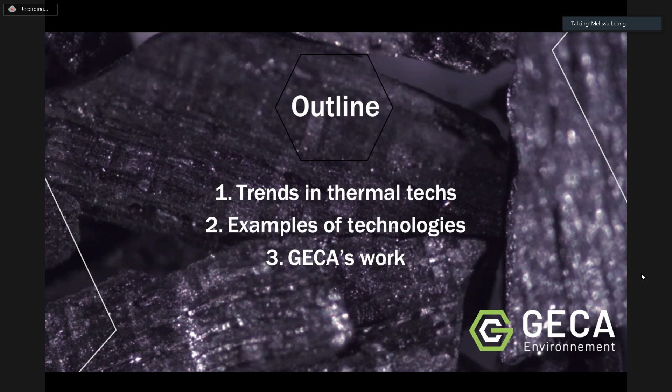Okay, so really quickly, the outline: I'm going to talk about GECA first. I changed the order, I think it makes more sense for your understanding of the data I'm going to present. Then we're going to talk about trends in thermal tech, what we're seeing these days, how it's going, and how it seems to be influencing the market. I also have short examples of technologies just to illustrate the variability and the trends in the market. Again, as Tim said, don't hesitate to ask questions and direct them to me directly after the session. It would be a pleasure to answer them and have a discussion if we can.

So first and foremost, I want to introduce our firm. We are a consulting firm, very specialized in valorization of waste, so waste conversion into renewable, valuable products. We specifically specialize in the thermal transformation processes of torrefaction, pyrolysis, and gasification. We're located in Quebec, Canada, so the black sheep of the Americas. We do speak French, but we actually have clients throughout the world, including a lot in the US. Part of what we do is really technical consulting, supporting project development in business plans, choosing the right technology—because we all know there's a plethora of them—as well as process optimization. For example, I'm in business development, and I also lead the carbon team. At GECA, we also do carbon project development and brokerage, specifically for biochar carbon credits. That's not the topic of my talk today, but feel free to ask questions on the subject as well.

Through our work, especially through our technology assessment and evaluation work, we have gathered a long list of technologies within the processes we specialize in. So what I'm going to present today is data coming from knowledge of these technologies and that list. All right, so everyone in the room, I think, knows what thermal transformation is.

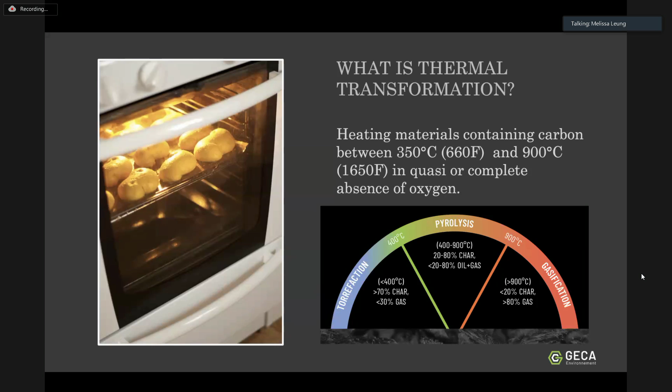I'm sure people mentioned it earlier in the presentations, but for this specific presentation, I'm mostly going to be speaking about torrefaction, pyrolysis, and gasification. Generally, these refer to very low amounts of oxygen in high temperatures throughout. That's really what we specialize in, and the data I'm going to present is specifically on these types of technologies.

So here we go with the data. Through our technology evaluation and our technology watch, we've listed more than 200 thermal transformation technologies - techs in gasification, pyrolysis, and of course torrefaction as well. We've listed them throughout the world, but most of the stats I'm going to present today are for North American tech, specifically from Canada and the US. We've actually been putting together a technology report that lists these technologies and their characteristics, and some of the stats I'm presenting come out of that report.

What we're seeing is that there's approximately 120 technologies that are at TRL 7 or more advanced in Canada or the US - they have to have an office or headquarters in Canada or the US for us to account for them in these stats. And we're seeing that the techs are mostly focused on large productions more and more. This graph on the left presents the size and the ratio of the distribution to the two countries. We're really seeing a lot of interest in larger technologies because smaller technologies have mastered the thing - pyrolysis gasification is a known technology, so lots of scale-ups are happening with tech providers. That's what this table is intending to present.

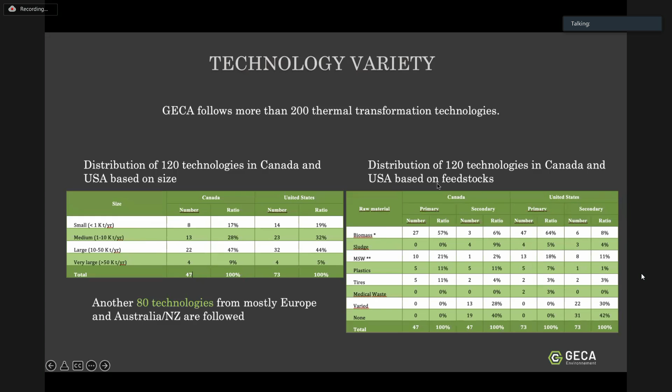We also looked in that report into what those technologies are looking to produce. We have people here presenting today talking about plastic transformation for liquids production, whether it's energy or chemicals. We have people talking about solids, talking about energy, whether heat or gases or both.

What we've seen in the US and Canada is that there's a bit of a difference. There's a focus in the US on energy and gas. On this graph, we can see on the third column here that the paler bar is for gas. There's a larger proportion of technologies where the priority is to produce gas.

Our interpretation of this compared to, say, Canada is that in Canada, energy is quite cheap. We're from Quebec - I know sometimes it comes out in the accent, sometimes it doesn't - but but in Quebec and BC, for example, energy is super cheap. We have hydro, and in Quebec we pay, I think it's 7 cents Canadian a kilowatt hour. So there's not this need for large scale gas or energy production. A lot of things are electrified and use electricity, even industrial processes. Same thing in British Columbia and in big parts of Ontario as well - so the three largest provinces.

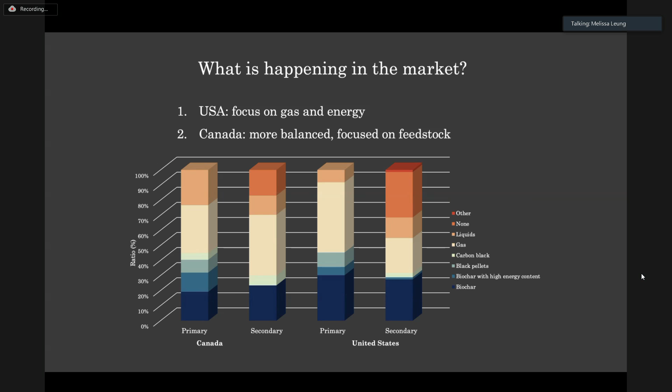So Canada seems to be more focused on the feedstock rather than necessarily on the products. So that's what we're seeing too.

Aside from those stats, we work every day in this market, and what we're seeing through technology assessments and evaluation for project development is that lead times have really increased for deliveries and manufacturing over the past year. Part of it seems to be due to COVID, part of it seems to be due to larger demand in general, and also prices of components are increasing. I can't see you guys, but if I say steel prices are high and increasing and that's affecting those technologies, I'm sure you'd all nod. So we're seeing a lot of that.

In the pyrolysis, gasification, and torrefaction sector, we've seen lead times go generally from maybe 6 to 10 months prior to COVID, let's say 2 years ago, to 12, 14, 18 months for some manufacturers. So double the lead time, and that can be a problem for project development and implementation.

We're also seeing a lot of cost increase. Steel prices, again, inflation, labor is difficult. Manufacturing has increased a lot. So this is something that's affecting the whole industry.

Another really large component that I don't know if it was discussed at the current conference is the carbon market. We work every day in biochar. I lead the carbon team in which we develop biochar carbon projects and sell biochar carbon credits. And that market has just exploded over the last 2 years. It is a new market, but the demand is so incredible that it's actually generating a lot of interest in those types of technologies, and manufacturers have orders piling up.

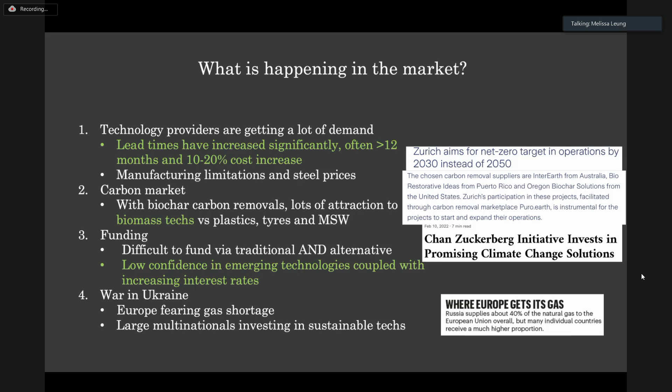And lastly, the war in Ukraine. I don't know if that was discussed again, but this is something that affects us quite a lot. In Europe particularly, it's fast tracking some projects because they're very afraid they're going to lack gas in the winter. So it's fast tracking projects that use biomass to gas or even other types of feedstocks as well. We're also seeing that the war is generating interest from large corporations into these types of technologies. So it's kind of some light within the dark of what's happening over there.

Something important I forgot to mention: we're very technology agnostic, so we don't have any links or contracts with any of the technologies for bringing business to them or anything like that. It's very important to us to be agnostic so we can give the best suggestions to our clients and find the best systems for them. And that's why they're not named.

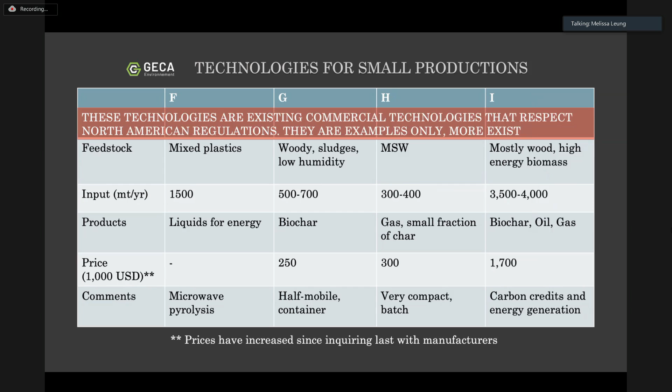I want to say something else, but I think I forgot. So I'll come back to it later, perhaps.

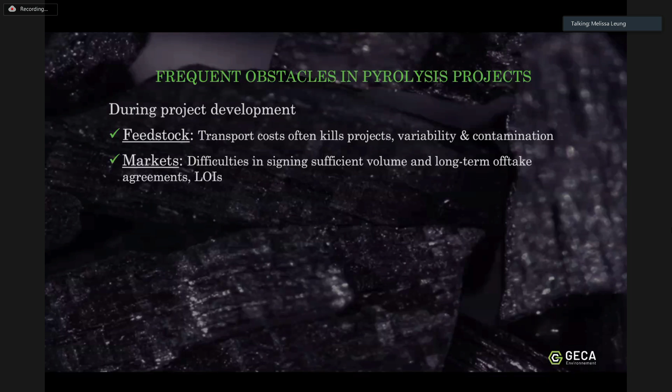Frequent obstacle in these types of projects: feedstocks, really important especially nowadays in the market. What we're seeing is that especially in biomass, feedstock prices are increasing, particularly wood. It's becoming more expensive and difficult to generate projects with wood. So we're seeing a lot of technologies move towards feedstocks like sludges, manure, and even mixed or contaminated biomass, because it's becoming harder to make wood projects financially viable. Carbon markets are helping there, but still in some instances it just makes things much more difficult.

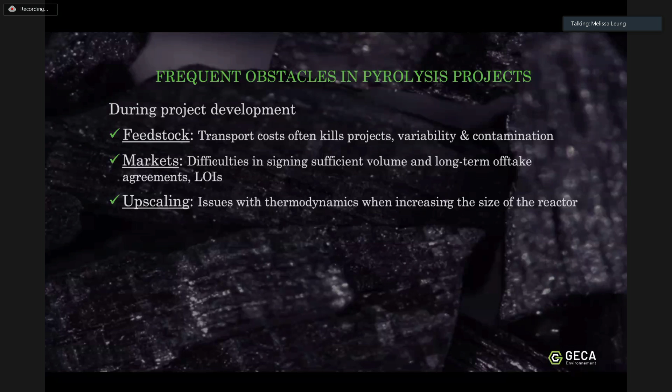Upscaling: we've had this technology watch for a while, and we're seeing more projects go from a certain size and enlarge their system. But it's always a risk—the thermodynamics sometimes don't work the same at scale. So what we're seeing in the market is systems designed for a certain size, with most project developers and manufacturers looking to add systems in parallel instead of upscaling to an enormous size. This provides a lot of risk mitigation—if one line fails, you can still produce using your other lines. That's really what we're seeing in the market.

Public perception, not in my backyard—this still stands for a lot of projects. I'm sure for a lot of people in the panel and conference, we still have issues communicating what these projects actually do and how they help the environment. Even though it's such an important component, it's not necessarily well understood by communities, and certainly not by environmental groups either. So it's really important to have good communication with them.

In terms of permitting and regulation, we're seeing changes occurring in the mindsets of regulators. The DOE, for example, late last year or early this year, issued an RFI on pyrolysis and gasification to look into reclassifying these technologies rather than classifying them under incineration. That's a really good thing, but these things take time, so it's not necessarily for tomorrow, but it's encouraging and we're on the right way. We're seeing similar things in Canada as well, and in Europe, who are advancing much quicker than we are in North America.

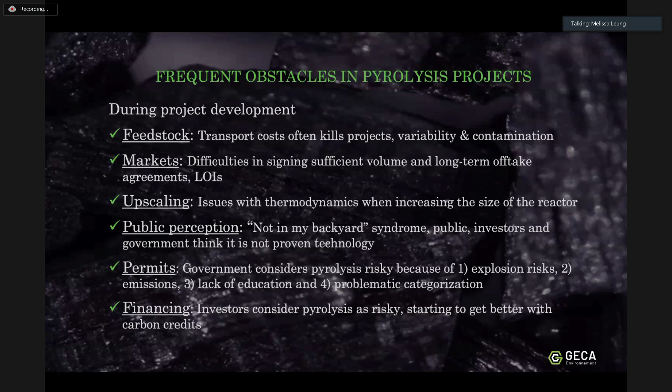We do a lot of technology selection. I mentioned a few criteria we look at, but let's not forget that choosing technology is one of the most important factors for a project—it will dictate CapEx, make or break a project, and dictate what products come out of it. So it's really important to go through a thorough process to choose the right technology for a successful project. When we do this, we base it on multiple criteria, probably over 100, including things like security—which aren't listed—company history, and experience. That's perhaps one of the most important key takeaways.

And lastly, before I finish, I work in carbon every day, so that's really my specialty.

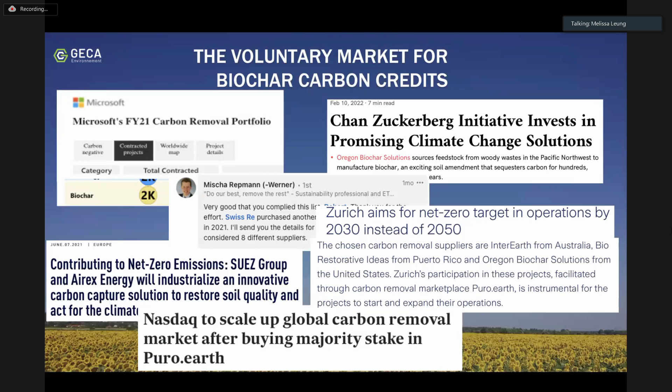So that's really important. If you have any questions on the subject, please don't hesitate. That's pretty much it, that's what I wanted to present today.

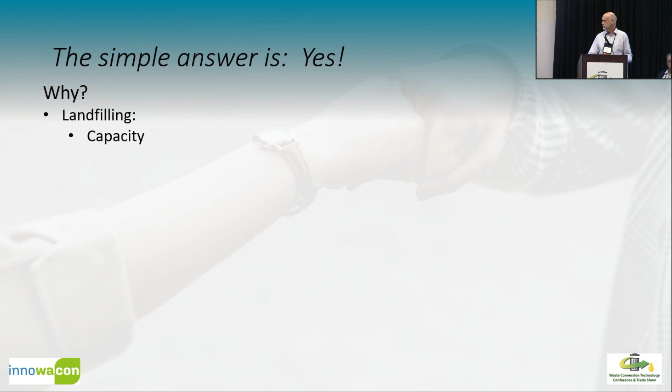Capacity, the siting, the waste hierarchy - it's not supposed to be going to landfills. You're supposed to use the waste hierarchy to reuse, recycle, and dispose of it, and the landfill is absolutely the last resort according to the hierarchy.

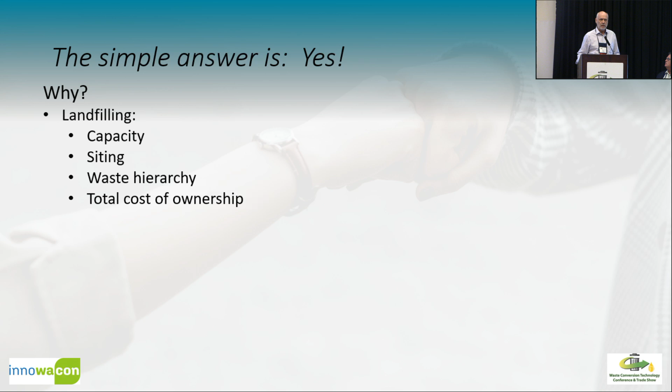You also have to pose the question: what is the total cost of ownership of a ton at a landfill? Some might say it's $40, $50, $60 a ton - that's my tipping fee. But what's the total cost of ownership? What's it going to cost to clean up the groundwater when the nice linings possibly break after 60, 70 years and leak into the groundwater? Who's going to pay for that cleanup? That's the total cost of ownership. It's a theoretical question - of course the liners do hold for quite a bit of time, but maybe beyond a certain legislative time.

You know the new acronym NIMTOO? Do you know that? Who knows that acronym, NIMTOO?

NIMTOO. That means not in my term of office. So anything comes along, we'll take care of it in my turn. When I'm gone, see you later.

Yeah, that's it. Anyway, incineration, we know there's problems with that. It is a technology that's been out there and works very well. I'm not bashing incineration at all. It works very well. But there's the NIMBY and the age of facilities that are out there.

They're getting old. They're going to be retired possibly. The Saugus facility, Saugus, Massachusetts, it's one of the oldest. It's run now by WIN Waste. They've had it for a long time. Was Wheelabrator, now WIN Waste. And it's getting old, and it's passing its time. They're trying to keep it going, but it doesn't really make sense.

Siting any new incineration technologies, NIMBY, not in my backyard. We don't want it there. We don't want to see that stack. We're worried about all the pollution that's coming out of your stack. Okay, they do clean it up very well. That technology's been around. They do work it very well.

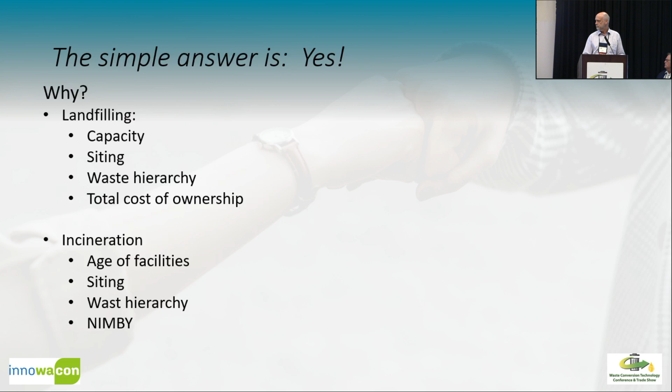To do this, one has to answer other questions. What current sustainable, future-oriented waste treatment and recycling practices and methods are being used out there? We'll discuss that later in the panel today about waste conversion anyway.

What do I do with my organics or my garbage? Depends on how you look at it. We call it waste, and you have the garbage or the organics on the other side. What can be landfilled? What should be landfilled? Sorry about that, go back one.

What complementary technologies can be used? Technologies that go along with this to make sure it works in a very complete way.

And these questions really have to be thoroughly addressed. A complete solution, you really want a complete solution out there, not just a piecemeal little project here and then, well, I don't know what's up front, I don't know what's out back. You want a complete solution to take care of it, combining the collection of the waste and the treatment and the recycling centers.

And a very sustainable waste treatment process itself, the accent on sustainable. Recycling, utilization, and disposal of the waste products for these processes, you have to think about the whole thing. What's happening, the complete process? What's happening to this material that you're taking out and you want to recycle it and use for other things?

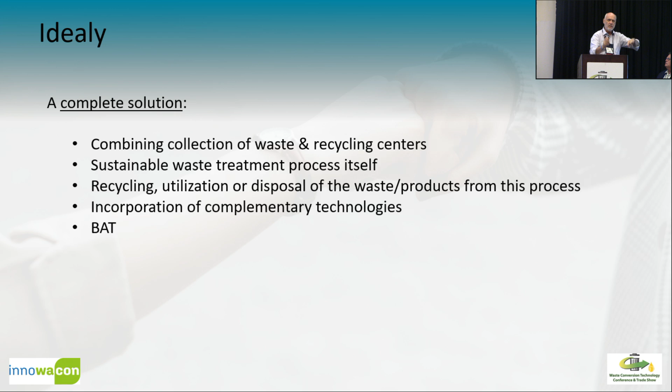Incorporating the complementary technologies and BAT. Who knows what BAT is? Or does everyone know what BAT is? BAT, best available technology. Not just state of the art. I kind of look at it this way: on a timeline, state of the art stays there, but time keeps on going. BAT follows in step with time because it's always reinventing itself, always making itself better.

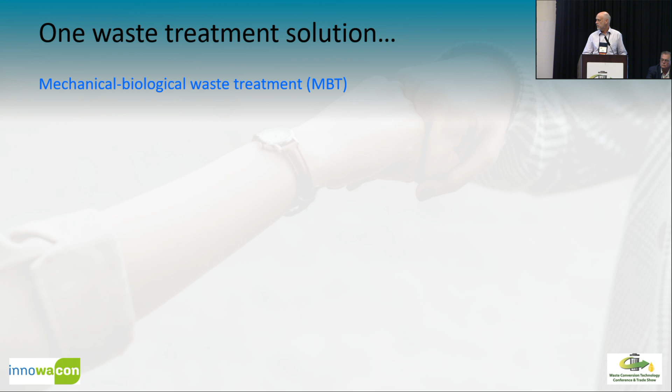One waste treatment solution is mechanical biological waste treatment, MBT. MBTs have had challenges in the past. They haven't addressed all the concerns that I've talked about above.

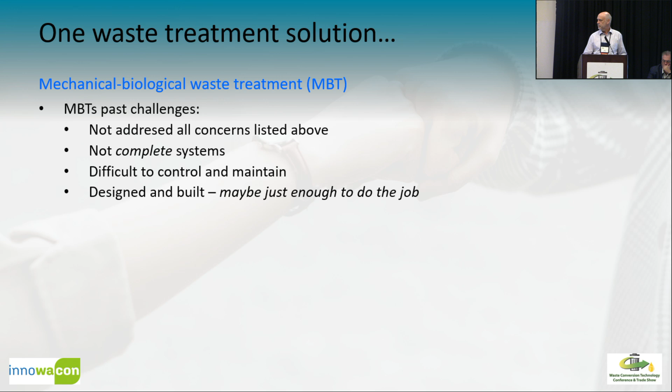They were not complete systems, and they were difficult to control and maintain. Designed and built, maybe just enough to do the job out there, but not completely. And didn't extract the maximum energy potential out of the waste to make use of this waste in the best way possible. They weren't sustainable.

This resulted in unreliability, meaning the plants weren't working, they weren't staying online, they're having a lot of trouble as people are racing around trying to fix things, get it running again. Non-availability, meaning the plants weren't up 24/7 or weren't running all the time. You needed even more than two weeks fixing time, repair time to keep it going.

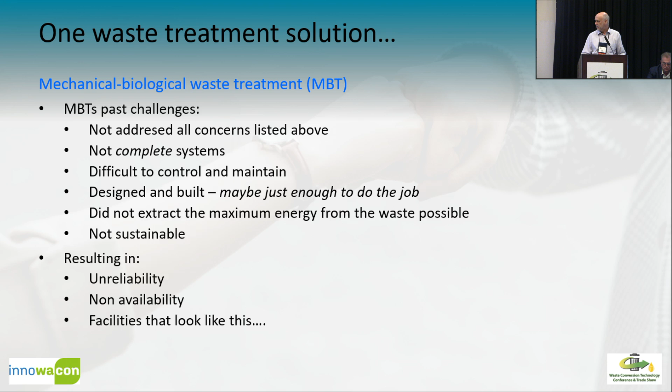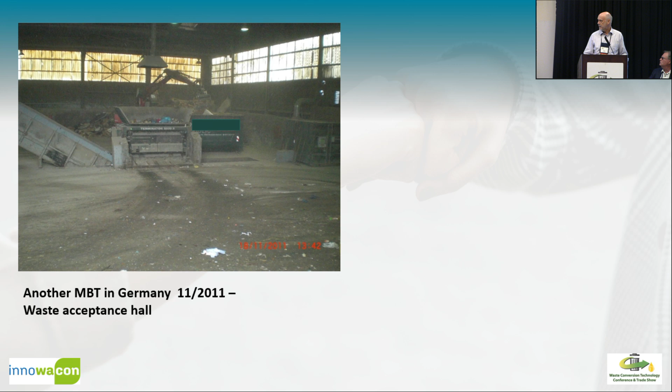And some of the facilities out there, they look like this. This is an acceptance hall, in Germany, one of the facilities. Well, I don't want to work in that acceptance hall there. Look at the windows, all covered. The trash all over the place. It also depends on how you maintain your facility as well.

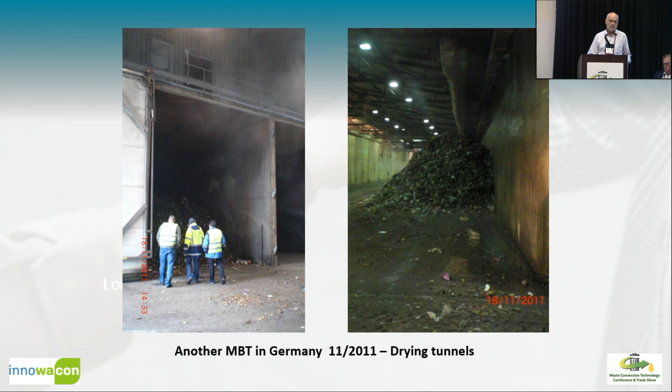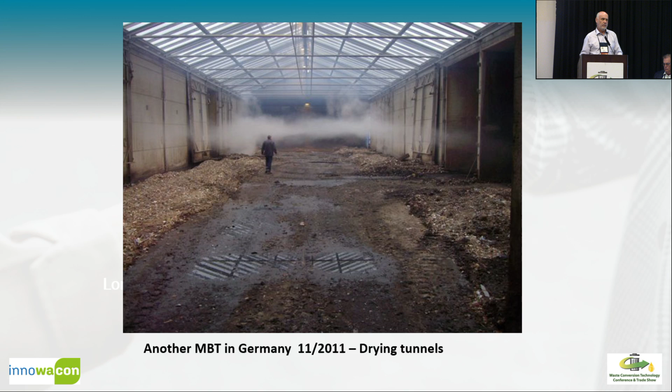And there's material piling up on the sides, causing a fire hazard. More vapors in the drying hall. If you look carefully on the right side, one of the doors has come off its track, so it's ajar, and you're talking about smells and dust.

Materials or equipment that has been improperly placed. So if you have to replace a pump quickly, it's damn hard to get to it in some of these kind of places.

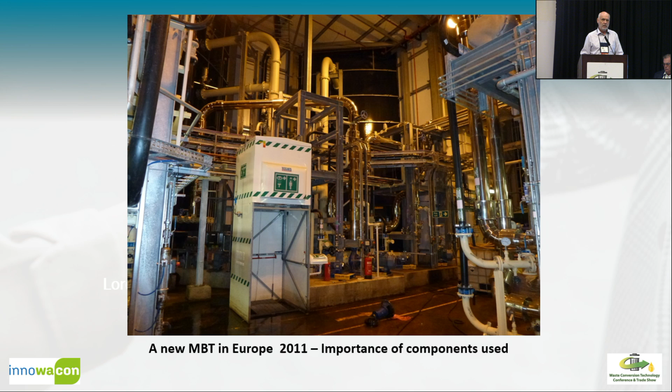Also environmentally unacceptable. Having a lot of this material outside, of course you have the outgassing, methanes, and other smells and odors. Very often places like that will be way out in the sticks, far enough away that you also have to transport your waste there - even more transport, and you know what that means these days: transport costs.

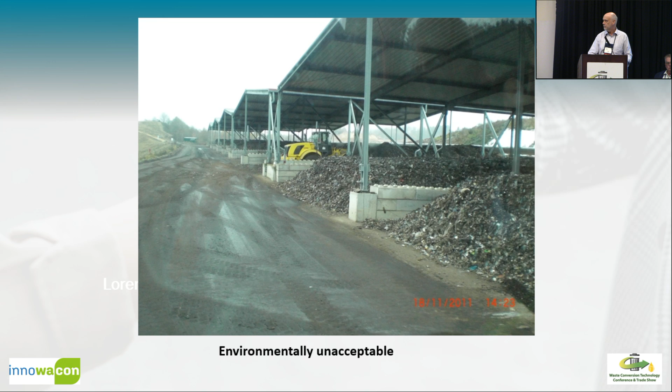These problems were addressed and resulted in what we call the maximum yield technology. It is not a product, it's a technology. It is sustainable, a tried and proven technology - not just new, not just rocket science, not just 'I think this is going to work' - tried and proven. It has been fully developed, well thought of.

Before it was called MYT, it was the ZAK process. They worked on it and finalized it and said this is working. It is a flexible product with the inputs and the outputs.

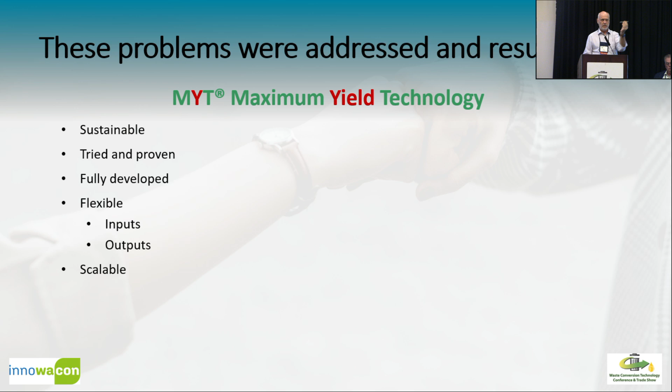It's scalable. On the flexibility again, also on the inputs, such a plant will be designed to the inputs that are brought to it. It's not like this device here - a product that can only do one thing, one size, with defined inputs and outputs, so you have to fit the inputs to it, or the outputs to it. Rather, this technology will fit to the waste that you want to bring to it, and the outputs that you want.

Scalable, starting at around 20,000 tons a year - let's say the minimum size you want - and up to 500,000 or more per year should be no problem. Eventually you might get so large that you might want to split the plants in a large city.

It's a German technology now available in North America, MYT - maximum yield technology. It is not a product, it's a technology, and it is BAT.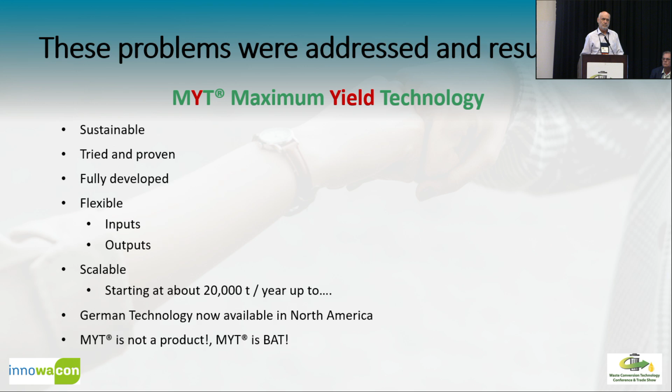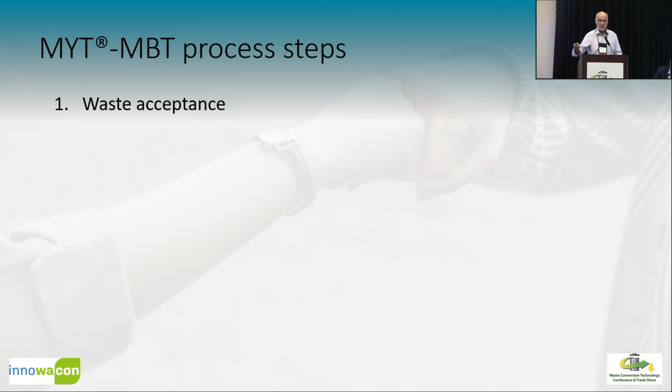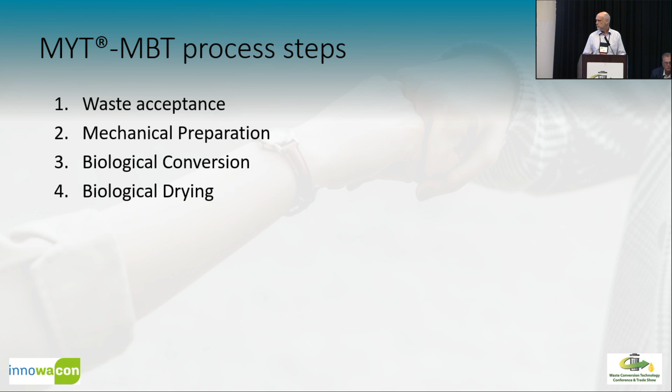These are the process steps - we like to look at it this way too. It is a complicated process, but it's done with the KISS principle. You know the KISS principle? Keep it simple and stupid - not 'keep it simple, stupid,' but 'keep it simple and stupid.' We have waste acceptance, mechanical preparation of this waste, the biological conversion of the waste, the biological drying, and mechanical material separation.

This is a flow chart. I can go through fairly quickly on how this works - left to right, of course. Waste acceptance, tipping floor - won't be looking like this, but waste coming in. The waste is MSW with the organics. What does that mean?

You don't have to have a separate organics bin to go chase after, with trucks going out there and people getting hurt. As we heard this morning, sadly, it's a very dangerous position to be in - a waste collector. So if you have one less truck out there, one less person picking up this organic waste, you are intrinsically safer working with it.

Anyway, waste acceptance hall - MSW with the organics comes in, gets tipped out there. There someone takes out certain large things. If someone throws out this pult here, or a table, or some chairs, or a motor block - we found everything in there - he can sort that out and bring it to the proper place.

The waste that's left, quite a bit of the initial volume, goes to the mechanical pretreatment side, where they also take out, via trommel sieves and hand sorting, certain materials like fuels, RDF, stones, metal pieces, glass pieces, and things like that.

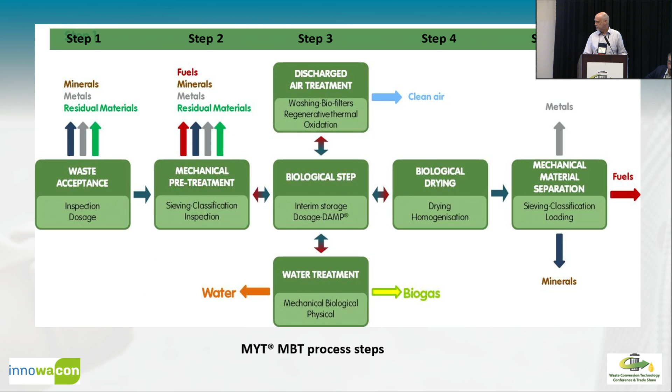After the biological drying, the solids go to mechanical separation, where we have different sifting and sieving devices and also densimetric tables, so you get RDF and inert material coming off of it. That's a real quick overview of this work.

We have the black bin, the standard waste bin, and very often in Germany this whole green or blue box, whatever color you see there, is how they do it in Germany. You will usually find a bio bin, organics bin there. They call it bio bin, organics bin in Germany, where you put your kitchen scraps.

We've heard today what happens with those kitchen scraps - a lot of plastics, contamination, stuff that is in there that should not be in there. In this case, the bio bin, organics bin, is part of the waste, with no separate collection.

In Germany you also find the packaging is done by the yellow sack. All packaging materials should go in there, including cat food cans, cans of peas - empty of course - Tetra Paks, and the like.

You will also find a paper bin with nice, clean paper to be used for the paper recycling industry. And also in town, a glass bin where you can put your different glass sorts in there, throwing out things like your beer bottles and other items.

The ZAK Kahlenberg plant in Ringsheim, Germany takes those two as one - that's what comes into the MSW with the organics. But the MYT can take all of this. We just have to know to design it properly, and we have to know what's coming in.

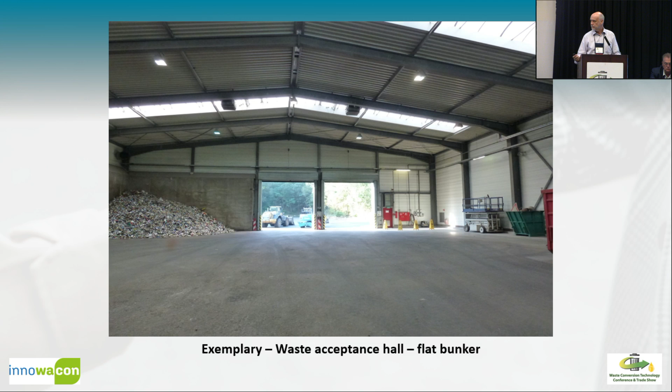This photo was taken in 2009. I was there at the time - I used to work at this plant. And this floor still looks like that.

2 young people run the 2 shifts a day. The whole plant runs 5 days a week, 2 shifts a day. These 2 young people run this plant, walking around doing their work, going from the trommel sieves, looking at different things happening, taking care of it, doing their sorting - not running to fix something real quick, because they do it ahead of time.

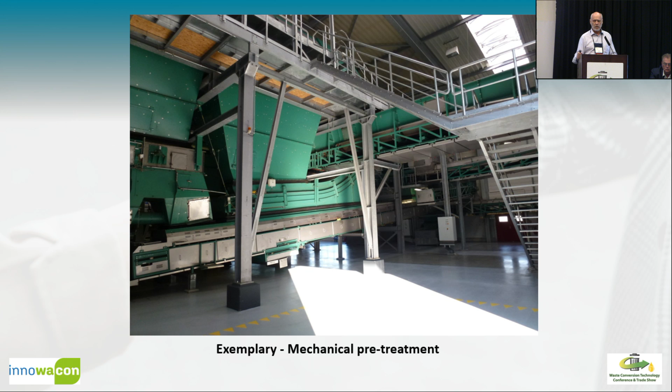Fix it before it breaks. Exchange a pump, exchange a conveyor belt before it breaks over time. You know how long these things will work? Well, it's time to get the pump there to make sure it's still working.

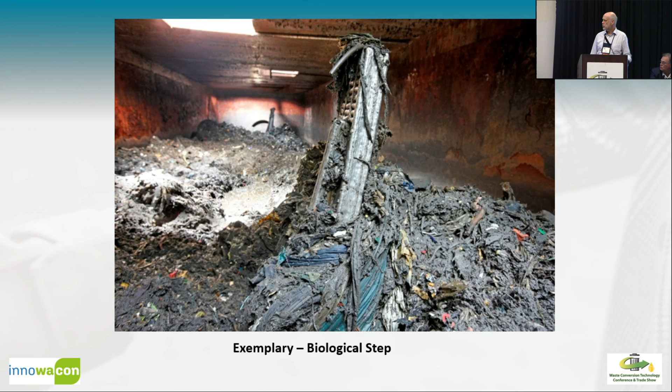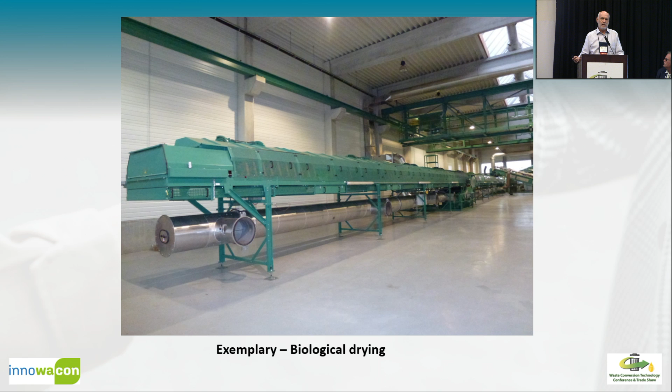Biological drying step, where the sludge from the fermenters also comes in. This way we don't have the problem of sludge going out onto the fields with possible plastics and other things in it. The sludge ends up getting dried here in these tunnels—you don't see the tunnels, they're on the other side. It gets dried and ends up as RDF, refuse-derived fuel. That's the final step, step 5, mechanical separation.

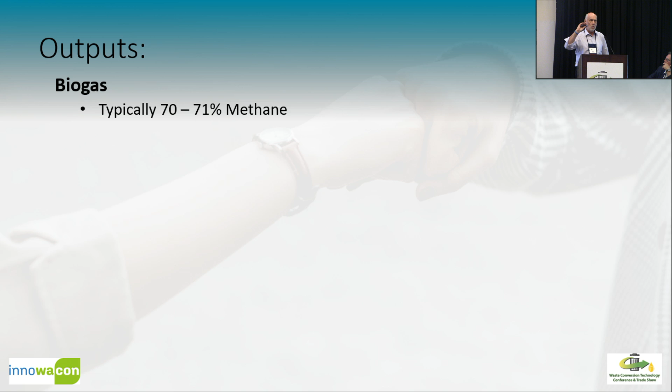Outputs are biogas, 70 to 71% methane all the time. On the weekend, we don't put the waste in and maybe the quantity is a little less, but the percent methane is always the same, very high—continuous, uniform production of CH4. It might vary a bit over the days, but it's not spiking up.

Approximately 7% of the original input. So at the Zack plant, around 7,000 tons of biogas per 100,000 tons of input.

That biogas is utilized, converted to RNG—we've heard a lot about RNG and what we can do with that—converted to diesel, green hydrogen, some might argue blue hydrogen, and even converted to cryptocurrency. You can't really do that directly with biogas, but it's an ingenious idea.

If you have energy sources, be it from this or from wind turbines, or from—what are the other ones out there?

Any source where you don't need the energy right away, especially renewable sources like wind turbines—you can take that extra energy they don't need right away and put it into a box. One side of the box has servers for mining cryptocurrency, the other side provides the electricity for the servers. So they won't be using grid electricity to mine cryptocurrency, which takes a lot of power. If you have electricity that's not being used and can't be used elsewhere, don't turn off the turbines, just let them run and use the electricity. It's a kind of interesting approach. I'm not trying to sell that stuff, but I think the idea is quite good.

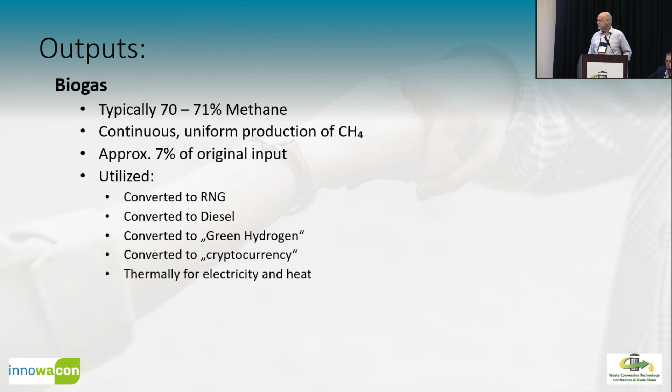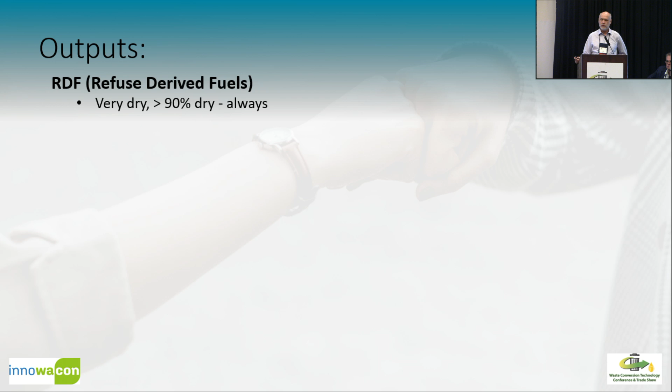You can use the biogas thermally for electricity and heat. Other outputs are the RDF, refuse-derived fuel, 90% dry as I said before, very very dry, with high calorific values depending on size. This one I have on the table might be around 10,000 kilojoules per kilogram, depending on the size—the larger the size, the higher the calorific value.

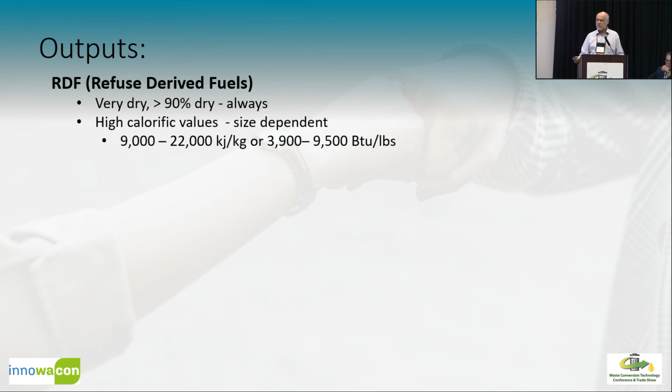And there's the BTU per pound—I believe that is the correct conversion value. Someone correct me if I'm wrong.

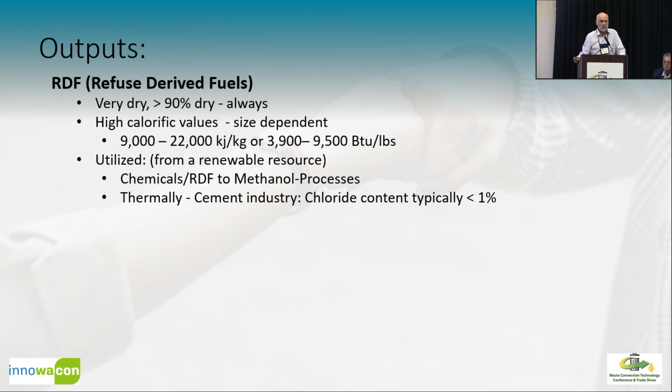It's utilized from a renewable resource, turning waste into chemicals and RDF, into methanol and ethanol. In the cement industry, they like using it in kilns because it has less than 1% chlorides in their cement. Power plants co-burn it with coal—though we're moving away from burning coal and co-burning with coal, it's still done here and there, but it could be used that way, or in its own RDF power plant if they want that. But please do not landfill this stuff—it's too good to bury. Why landfill energy, a resource?

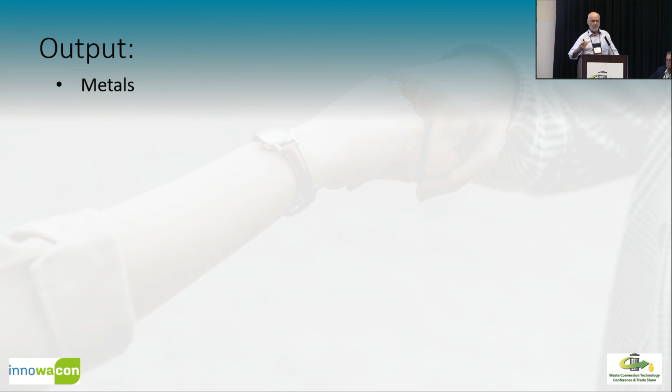Another output is metals—extract the metals for maximum yield and bring them to a scrap dealer for sale, sorted by the different types of metals. Mineral sand, stone, and porcelain chips can be landfilled. What's nice is that if you landfill them because they can't be used for anything else, the volume is considerably less—from this plant, it's around 10 to 11% of the initial weight coming in, but much less than the initial volume because it's much denser. So you can extend the landfill's life just by putting in the inert materials.

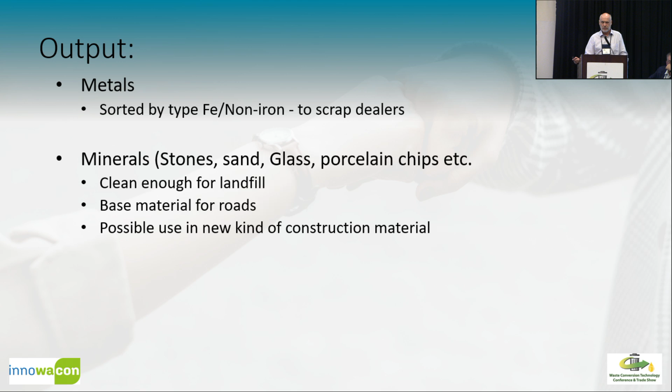It could also be a base material for roads, or used in a new kind of construction material, kind of like AAC, autoclaved aerated concrete, or similar.

The glass that you take out, you could bring it back into the circular economy if glass were a resource people wanted. I don't think anyone could say right now that it's a resource everyone's looking for, so maybe landfill it.

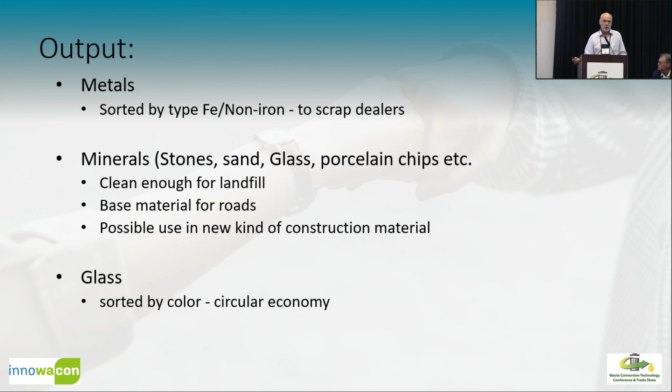As for the plastics, you could call it an enhanced MRF, but MYT is not a MRF.

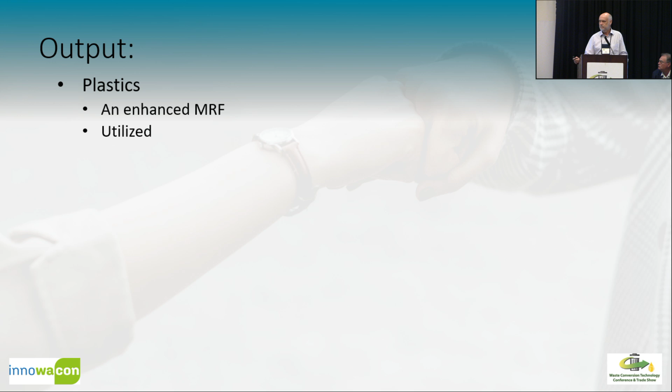Utilize, sort them by type, bring them back to the economy, using pyrolysis gasification as we talked about before, making new high-quality pellets as possible. Thermally utilized, as we've said, chemically utilized, that was talked about before.

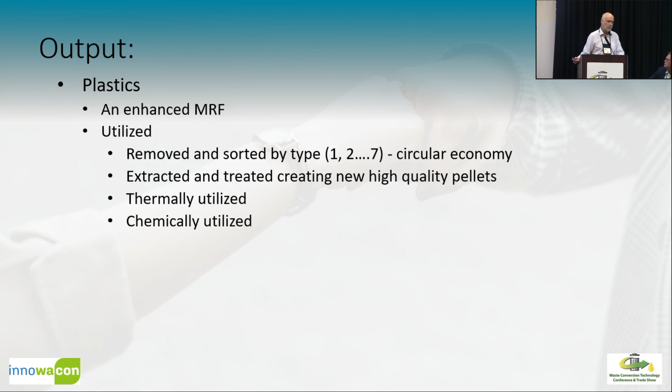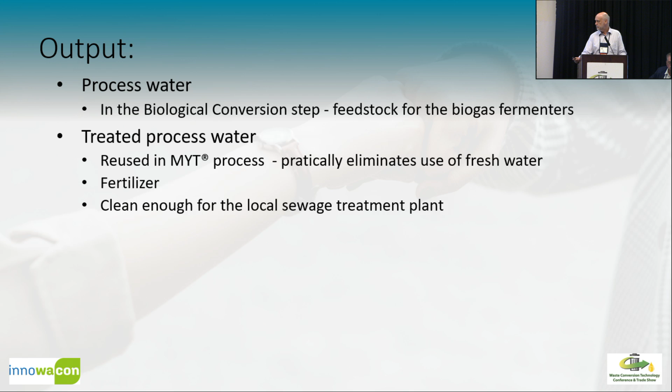The processed water that we have from the waste, because there's always water coming in with the waste, is used in the biological conversion step and then cleaned well enough to go into the local sewage treatment plant for further processing. Maybe some of it can be used also as a fertilizer, depends on the contents. We talked about PFAS before today, that has to be looked at. And it's clean enough for the local sewage treatment plant and can be used as the water source for some methanol processes, such as the company in Canada.

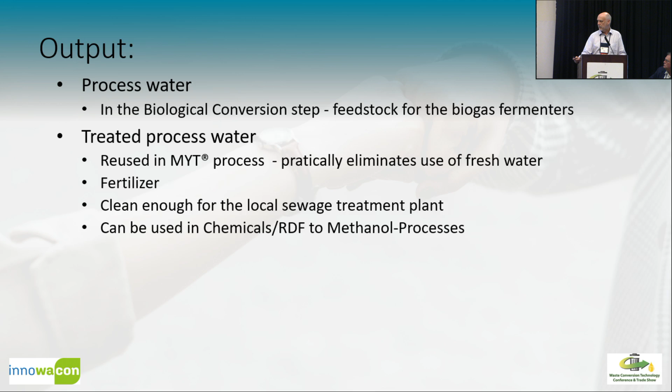This is kind of a breakdown. The 100,000 tons that the ZAK plant takes in produce around 38%, 38,000 tons of RDF, 7,000 tons of biogas, and the treated water that comes out. There's some losses, minerals, you can see it. I have also some brochures out here if you'd like to see more information later on.

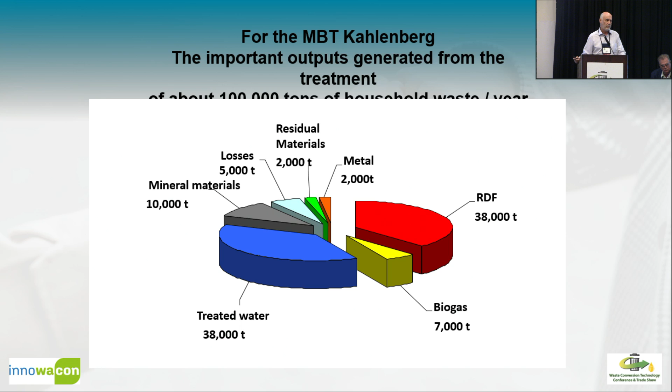Cost to the citizen is kept low because it's a complete package, complete solution from the collection to the process to getting rid of this material. Do it right the first time.

A 4-person household in Germany, or in this county we serve, pays 91 euros, or let's say around $100 or 127 CAD a year for the complete process. Everything, the complete process: collection, the plant, the 20-odd recycling centers we have, administrative paper pushers.

If one knows what one pays for the waste, and that's different than a lot of communities here in the States, you get once a year a bill from the town, and it says 91 euros, and you know that if you create less waste, you can pay less by downsizing your bin. They're going to think of ways to, one, recycle more, and create less waste, which we actually all want in the long run anyway.

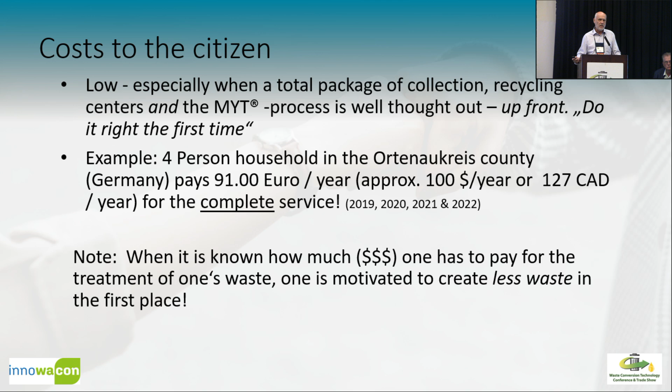You're going with the hierarchy very nicely. So people want, if they can save, let's say 20 bucks a year, that's a couple Starbucks coffees. Look at it that way too.

There's some reference facilities we have. The one in Germany is the first one. It has been operating since 2006 with 100,000, 105,000 tons a year, non-stop, no downtime, no two-week overhaul time since then, and still operating. And the floors, except in Hall 1 where the waste comes in, are just as clean as this floor here, all the time, except when they're doing some repairs and opening things up.

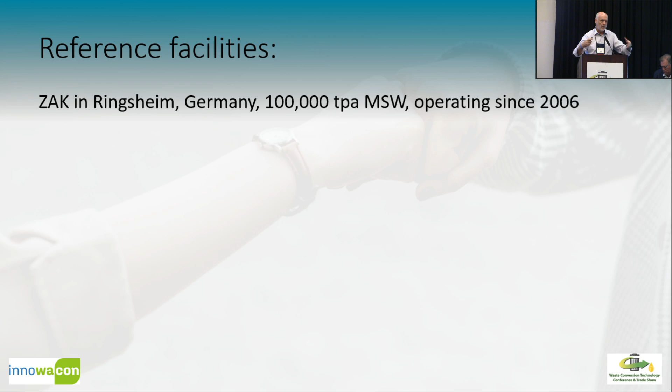One in Hénin-Beaumont in France, close to Lille, 86,000 tons, been operating the same way since 2015, but the French waste is different than that German waste we have, slightly different. It was made to fit that waste.

On-Nut project in Bangkok, Thailand, 300,000 tons a year, operating since 2019, and the Thai waste is around 65 to 70% wet. It flows out of the trucks like a soup, and it was designed to take this waste. That could be a very messy place to work in if you have that around your boots.

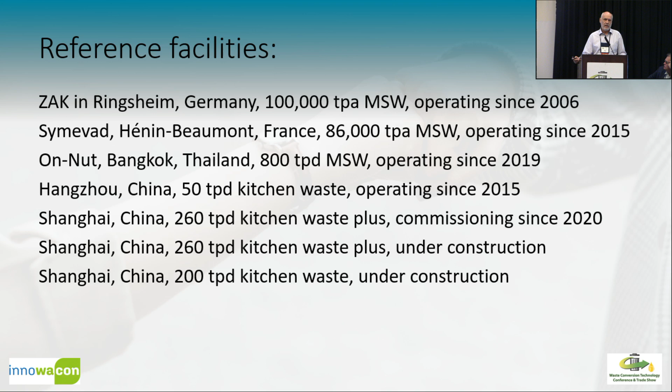And other smaller ones that have been built, and I believe they're building one right now in Vietnam. None yet here in Canada and in the States, but that's what I'm working for. We're trying to do that and bring this technology here.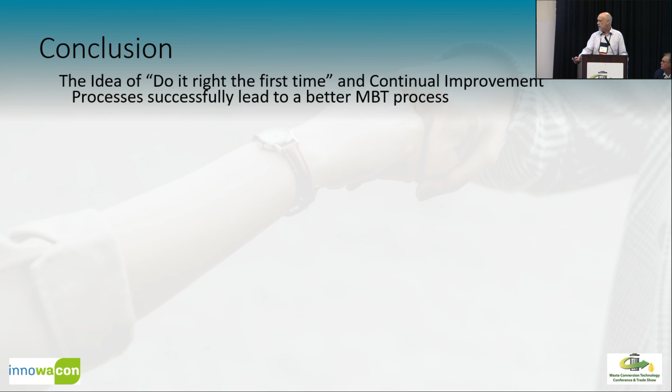So this is do it right the first time, with continual improvement and process successfully leading to a better MBT process. Think about what you do in the beginning. Make it work. Maximum yield technology is that. It's a viable and sustainable MBT process.

Reliable, high availability, meaning it's always working if you keep the process running, like you're putting oil in your nice car. Oil, gas, water, keep things running, change the fluids.

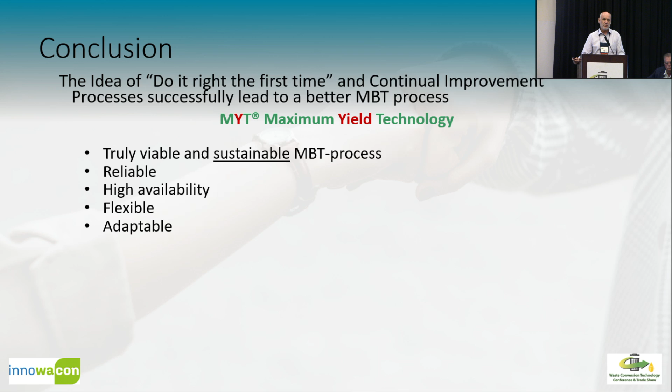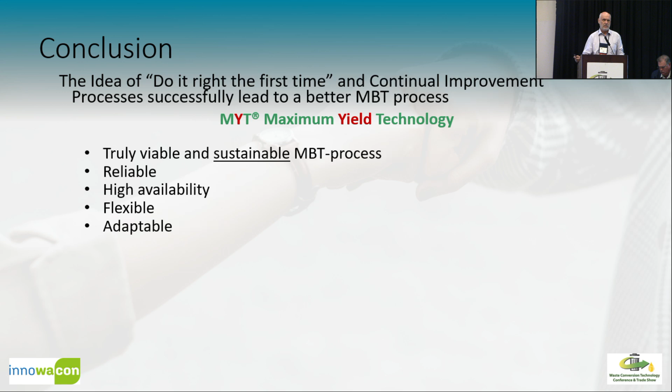It's adaptable to the different sizes that you have. For example, if you have 100,000 tons now or 200,000 tons now, you design it now, and a couple of years down the road you know you're going to bring in another county into your waste regime. Well, you design the space to the right or left of it to take it on later. You populate it with your machines now, and later on populate it with the machines to fill that later. You can incorporate it into the local existing waste regime. You don't have to change everything to do this. Safe and clean workplace.

OSHA likes you. You want people to be happy, healthy, and working there. It's hard to get people these days. It will be designed to the regulations, and they will be upheld. It's a very high diversion from landfill, of organics from landfill especially, and it's in line with the circular economy. Take out what you have to and bring it back in. It is designed to fit, not too big, not too small. Thank you very much.

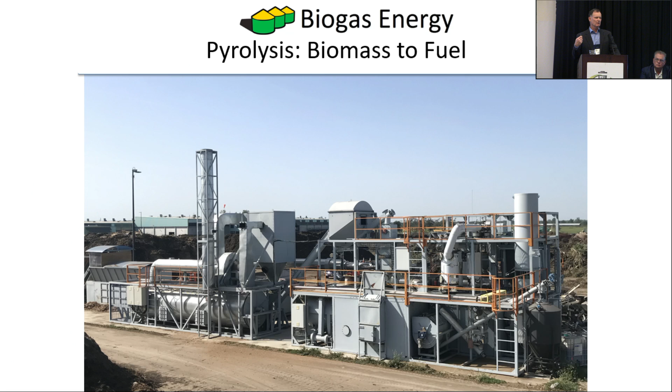This project is operating today in Roseville, California, just outside of Sacramento. These are the feedstocks we've used: forest residues, so that's everything from slash, logs, anything coming out of Placer County's forests, urban waste, stumps, limbs, that kind of wood waste, and construction and demolition wood waste, converted over from bins that go from construction sites. They remove the wood from that and feed it to us. And then ag wood waste, so we tested everything from almond waste to whatever comes off the ag side of it.

We're currently testing biosolids and plastics at the bench scale, and then we'll do that at the demonstration scale early next year.

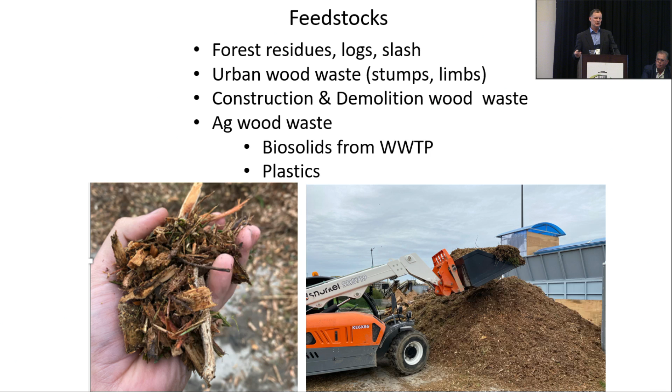So this is what we do. Starting with the F for feedstock, fast pyrolysis in this case uses a combination of heat and friction to instantly vaporize the material. What you get is a biochar that goes down, that's the char at the bottom there. We get about 15% of the biomass converted to char, and the rest goes into a vapor, which we call pyrolysis gas. When you take a vapor and cool it, you can condense out the oil, the tar fraction, and that's the bio-oil. The rest of the gas that remains in gaseous state is combusted to maintain the heat for the process. The bio-oil is about 70% conversion of the biomass in our process. So it's about 15% char, 15% gas, and 70% converted over to bio-oil.

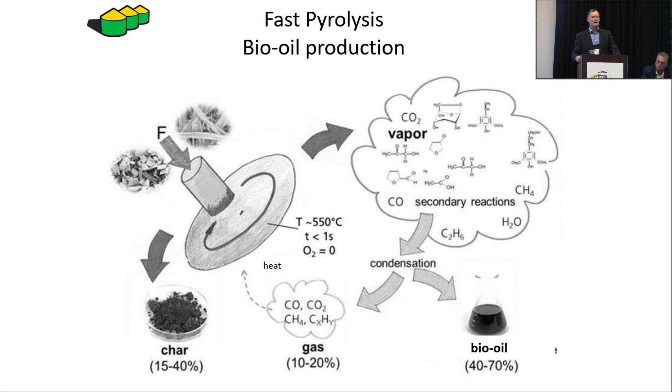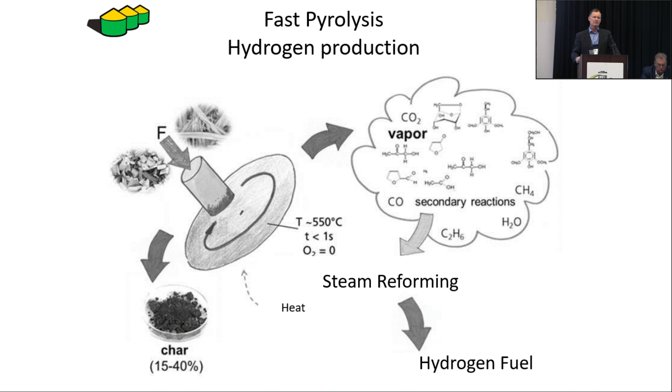I'll go a bit more into what that bio-oil can be used for. We're also exploring an option to leave the energy of the oil in the gas and use steam reforming to make hydrogen from it. That's our next phase of development.

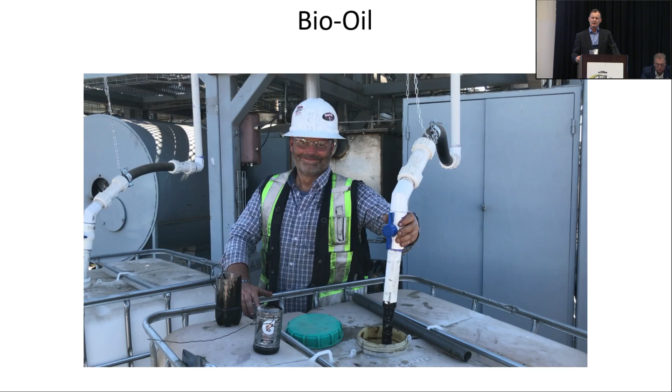But what is bio-oil? This is the stuff coming out of the reactor itself. It's black, looks like crude oil, and it's viscous. It's about 50% tar material and 50% wood vinegar. Melissa talked about some of the outputs from pyrolysis. The wood vinegar is a natural organic pesticide, and you can separate it out from the bio-oil to get a cleaner oil to process. And the biochar itself, there's a lot of interest in it. It's carbon, a skeleton that remains after you vaporize the material out of the wood biomass, and it's really good biochar.

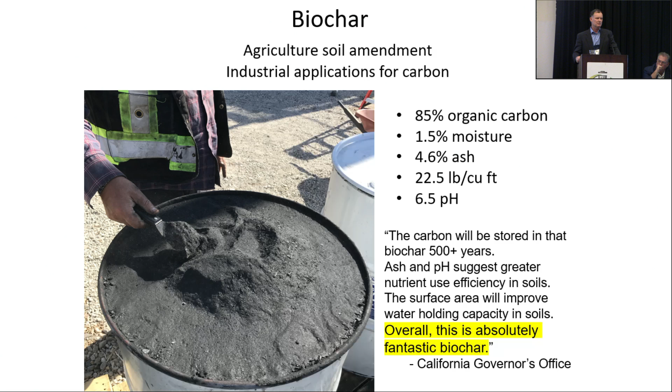Biochar, you can see all kinds of gradations of biochar quality, anything from 50% moisture content to ours, which is very dry, about 1%. 85% carbon is very good. So the process itself, although it doesn't make biochar as its primary product, it is a very nice byproduct.

This demonstration project does 20 tons a day of input. So after drying, that comes out to about 15 tons a day going into the reactor. We produce 1,850 gallons a day of bio oil and 3 tons a day of biochar.

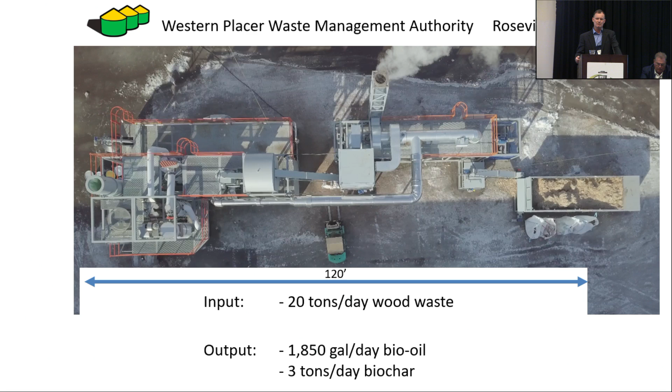So what's the business model? We will put the reactors wherever the feedstock is sourced, to minimize shipping and to condense the energy value of what we're going to access. So the biomass to bio-oil, we can locate them in the forests, in the agriculture country, at wastewater treatment plants, material recovery facilities for the wood waste coming out.

And then the oil, what do we do with it? Well, we got a grant from the U.S. Forest Service to demonstrate using the oil in a boiler to make just heat. And they put us in touch with the Department of Transportation, who then forwarded the oil to a laboratory. It turns out bio-oil is an excellent additive for asphalt and recycling asphalt, which is a big problem. This is all new to me, but doing tests through the Department of Transportation, temperature variability is very important in asphalt, as you can imagine, in how it's managed in high or low temperature regions. The bio-oil, adding just 2%, increases the range for the asphalt.

Smoke flavoring, when you get bacon, you're actually eating pyrolysis flavoring there. So we've got a company that wants to buy all of the oil we can make to make sausages. And the wood vinegar itself becomes an organic pesticide when separated out from the oil.

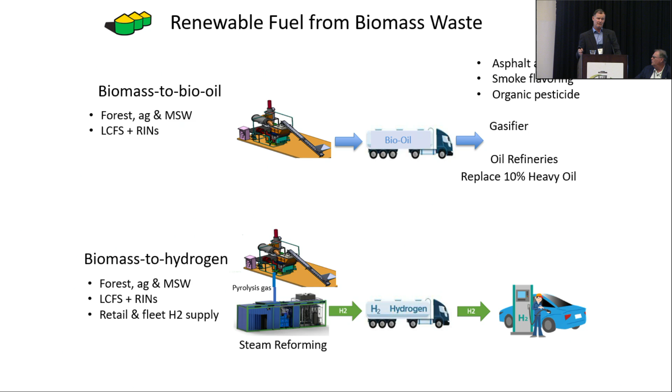Hydrogen, of course, is also a big deal, especially in California. So the challenge there is to get a steam reforming system small enough that you can size it to a 100 ton a day or 200 ton a day reactor, rather than these massive ones at oil refineries today.

The big challenge for California, and in a broader sense the US and Canada, is the urgency of the issue and the massive demand for getting this biomass out of harm's way. So our approach is to not be finicky or try to make it too delicate. This thing is built like a tank, so we just push that stuff through, and we've got 2 guys on staff at any time just fixing stuff as it goes.

Pyrolysis has been around for ages. There's no need to make it too difficult to do. We're just there to push this stuff through as much as possible. This is operating at a MRF right now, and we're developing projects both in the Sierra Nevada forest and in the Central Valley for ag waste.

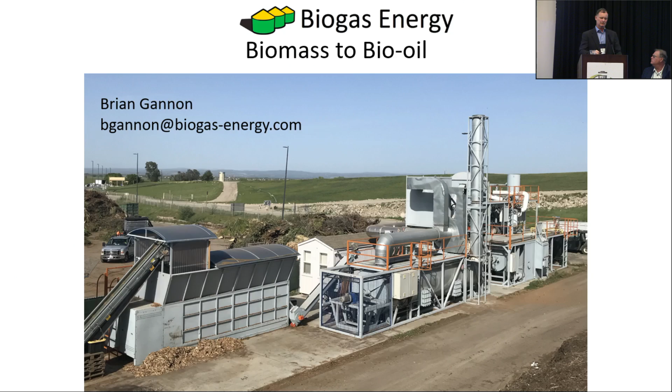Thank you. Do we have any questions? Yeah, we got one right here.

Sorry, where did you say that facility was? This is operating in Roseville, California, just outside Sacramento.

How long has it been operating, and what are the top 3 issues when it shuts down or you need to repair something? We started operation in the summer of 2021, so it's been operating a year. The biggest issue we faced was contamination of rocks. So when rocks got into the system, it would hurt the machinery. You just had to maintain that. We solved that by being more selective about the material we put in. The rocks came from our attempt to pyrolyze the wood from compost rejects.

So you can imagine there are huge compost piles. They sift it, and they're left with wood byproduct. So we thought, well, let's take a crack at that. Bad idea. It had rocks get into the system. We avoid that now.